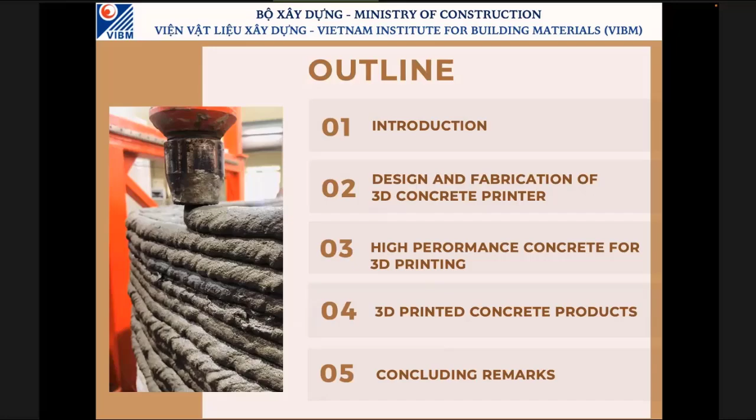VIBM, Vietnam Institute for Building Material, was founded in 1969, and we are a National Science and Technology Research Institute in the field of building material, construction environment and infrastructure. We assist the state management and nationwide development of the building material industry, construction environment and infrastructure for the Vietnam government, and directly for the Ministry of Construction.

So concrete research is one of our key research areas.

Basically, 3D printing is an additive layer-based manufacturing technique, and you might already know some very basic steps for 3D printing. The first is 3D modeling: objects are designed using 3D modeling software, which is very popular now. Then it needs to be formatted as STL, giving information on coordinates and boundaries. Then it should be sliced into layers of the same height, converted to G-code, and transferred to the printer for printing the material.

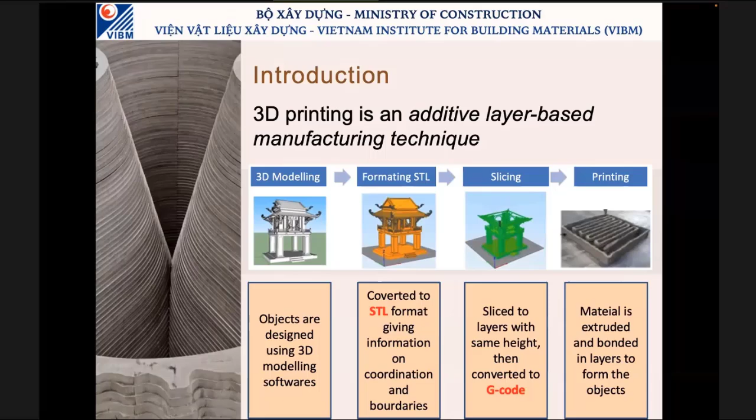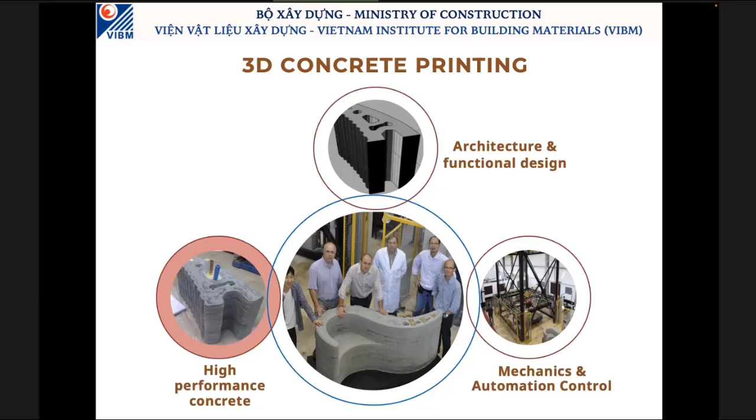So 3D concrete printing, in our view, should be the combination of architectural functional design with high performance concrete, using mechanics and automation to control a 3D printer. I joined Loughborough University over 10 years ago, and we printed the first bench in the world—you can see it on screen with our research team.

In the early stage of research, I joined Loughborough University and we did a lot of tests with the 3D printer—that's the 3D GANTry printer, also the very first printer in the world. We published some key papers, journal papers, like developments in construction scale additive manufacturing process, mix design and fresh properties for high performance printing concrete, and also hardened properties for high performance printing concrete.

I'll show you the graph here of the citations of our journal papers. Over 10 years, the first paper now has nearly 1,000 citations, the mix design and fresh properties paper now has nearly 800 citations, and the hardened properties paper has also been cited over 600 times.

We found that about 5 years after publication—around 2012 up to about 2016, 2017—there weren't many citations for the papers. But in very recent years, about the last 5 years, the citation numbers increased very significantly. You can see in the graph the number of research projects in the world, coming from many countries, also increased suddenly in the recent 5 or 6 years.

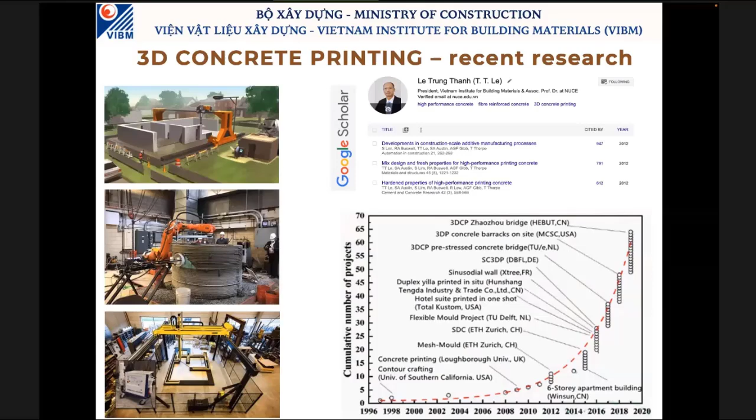With us in Vietnam, Vietnam Institute for Building Materials, we also work with some universities like Hanoi University of Civil Engineering, and also another university, the Technology University in Hanoi called Phenikaa. And we try to design and fabricate a 3D concrete printer, the very first in Vietnam.

We agreed with each other that some key points for designing a concrete 3D printer: it should be a large 3D printing system using a drive system to control the position of the nozzle according to the X, Y, and Z coordinates, using the concrete 3D printing technique by extruding cement concrete material through a nozzle to print concrete layer by layer. This type of design is simpler, more powerful than other options, easy to manufacture, and uses locally available components, which can reduce the cost when building at a larger scale compared to a robotic arm.

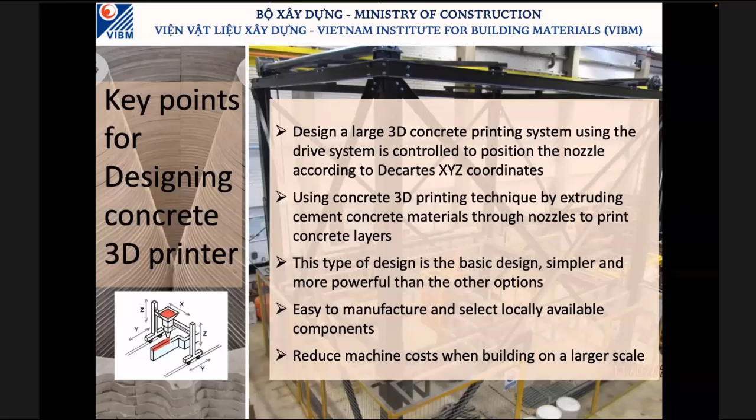We understand that the robotic arm, which some research centers use, is very precise, but we worry about the scale. With the robotic arm, it's hard and inconvenient to print larger scale construction structures. So we went with the 3D gantry printer.

This is what we built, fabricated as our printer in Vietnam. We use a printer with X, Y, and Z Cartesian coordinates. The X-axis assembly has a stroke length of 1.8 meters, the Y-axis is 3 meters, and the Z-axis is 1.8 meters.

The printer is driven by a servo motor with rotational speed control. We designed ourselves a nozzle component, including several parts assembled together, and we use an auger system in this nozzle, with the auger also driven by a servo motor.

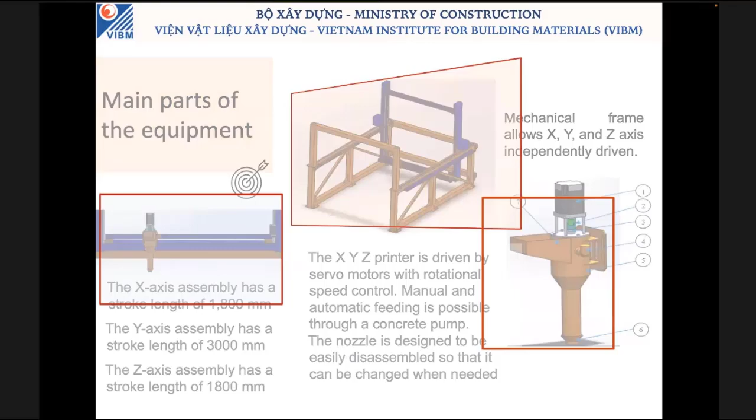With that sort of system, we did the assembly and we have the 3D printer. You can see this is the real one we completed last year.

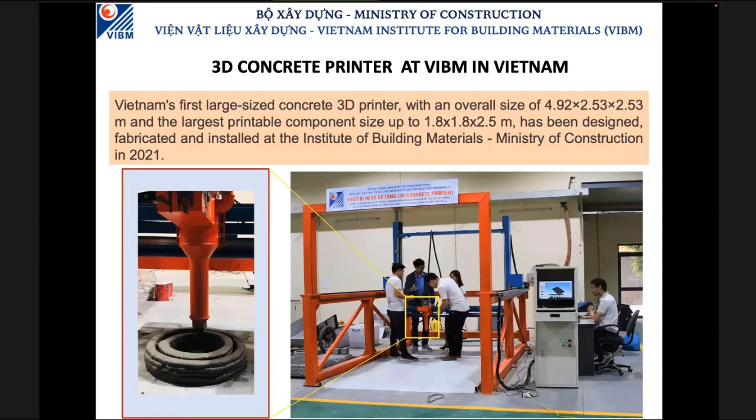The printer's nozzle connects with a concrete pump through a soft pipe, and we can also control the concrete pump to pump fresh concrete to the nozzle directly. We also have a control box with our own developed software, though there is some available software in the world. We started to design components and print some components.

Now we move to the second part, to introduce the high performance concrete for 3D printing.

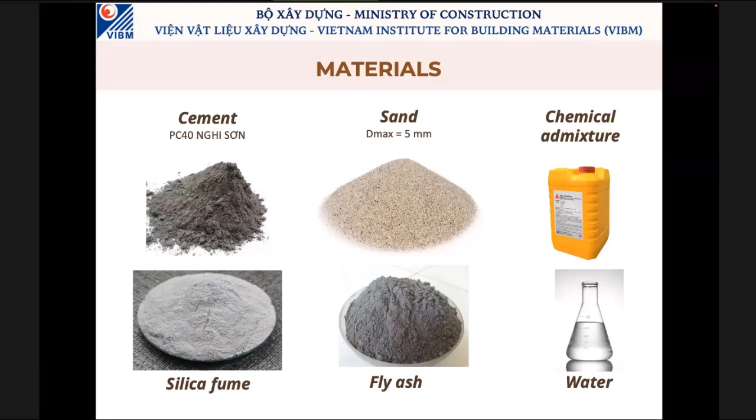We use readily available normal raw materials, including cement PC40 and also PC50. Different from other countries like Europe, which use 52.5, in Vietnam we use 50 and 40. We use sand with a maximum size of 5 millimeters, and we also tried a maximum size of 2.5 millimeters. We also use silica fume, fly ash, which has a very large volume in the Vietnam market now, and for chemicals, we tried different admixtures but came up with one of the Sika admixtures.

The mix proportion was optimized based on some very basic criteria: workability, open time, strength, extrusion, and durability. If you have read the paper we published 10 years ago, we define what buildability, extrudability, and open time are.

We all know that 3D concrete is really challenging because it should have very good fresh properties for extrusion, but it also needs to have good buildability, which we define as the ability to build as many layers as possible. In open time, we need to keep the fresh concrete as fresh as possible.

The very basic measurement is testing workability, and we need to test it after time intervals to know how many minutes or hours it can keep its fresh properties. In this series of tests, we tried to optimize with different silica fume content, fly ash content, water ratio, and aggregate ratio.

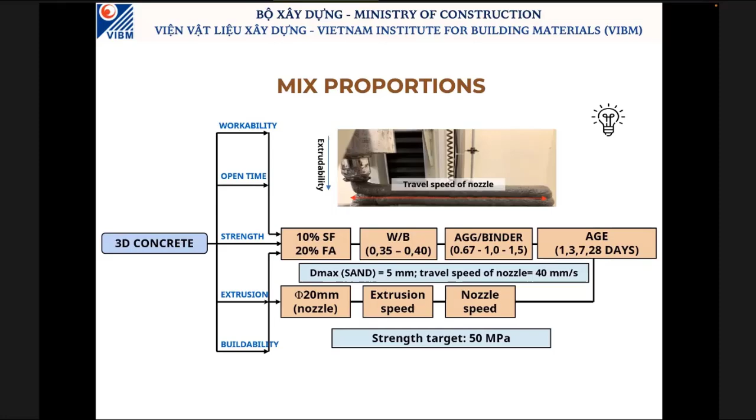The strength target was 50 megapascal.

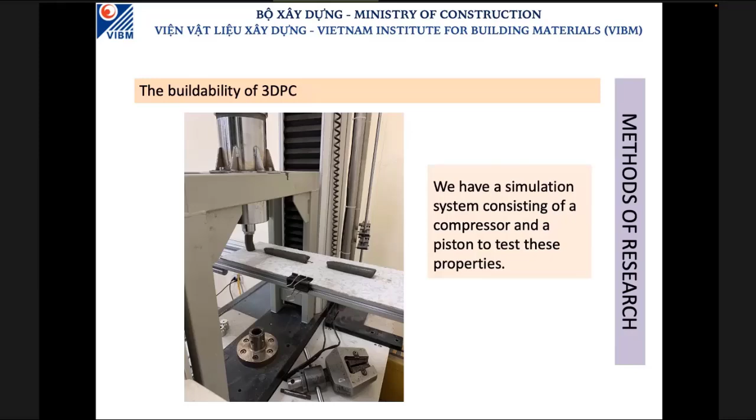So the method of research here, we do a lot of buildability tests. First of all, we use a motor with the compression machine. We use this equipment we developed ourselves, designed and fabricated in VIBM with the piston system. That's a simulation system consisting of a compressor and a piston to test the buildability.

We did a lot of different mix proportions for optimization. We mix this, measure workability, then put it in our measurement system for buildability. This is a piston system, a small piston.

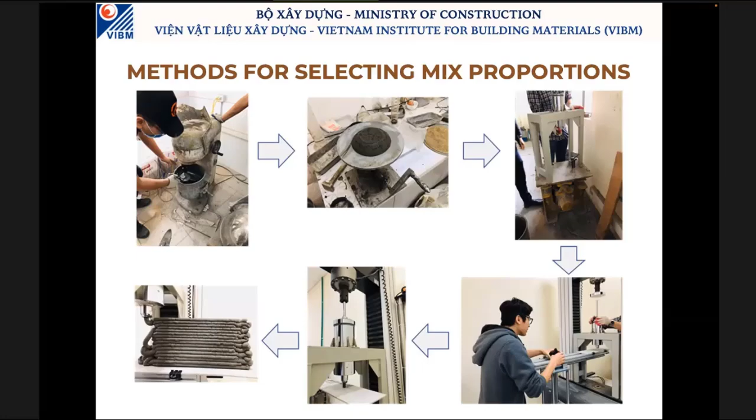The workability, we test with different water binder ratios: 0.35 and 0.40. Sand binder ratio vary at 0.67, 1, and 1.5. We test the workability and measure after 60 minutes.

And we found that a number of different mixes decrease the workability after time.

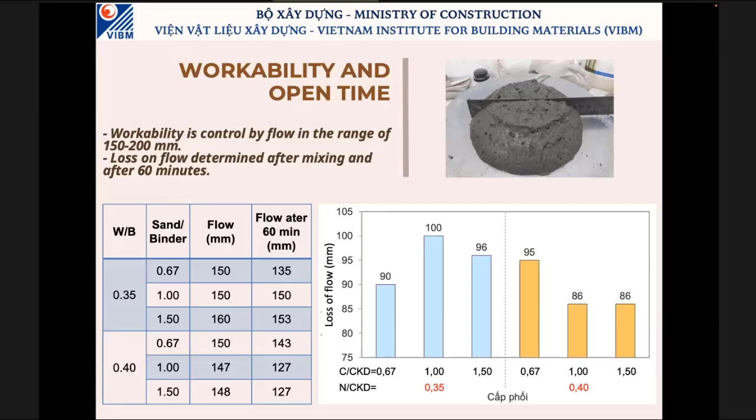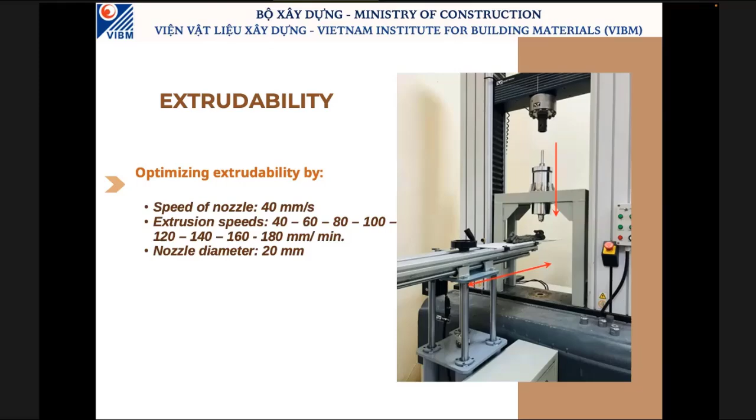For extrudability, we try to optimize by variation of speed of the nozzle, 40 millimeters per second, with extrusion speed 40, 60, 80, 100, 120, 140, 160, 180 millimeters per minute, with 20 millimeter per minute interval. The nozzle diameter we test using 20 millimeter diameter, and you can see here the extrudability.

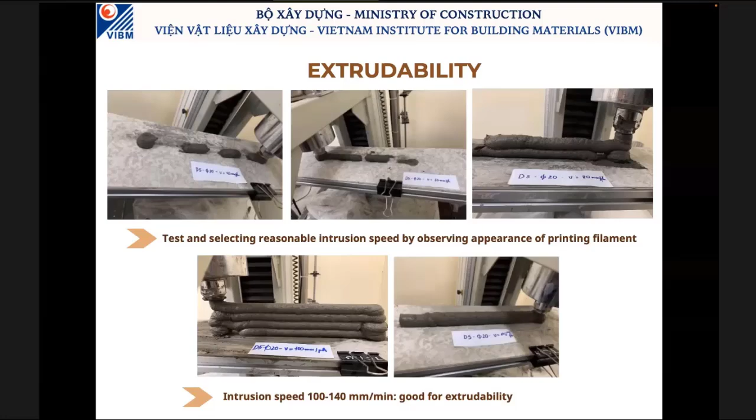Some mixes were not really good, and finally we found some mixes had good extrudability. The extrusion speed should be 100 to 140 millimeters per minute.

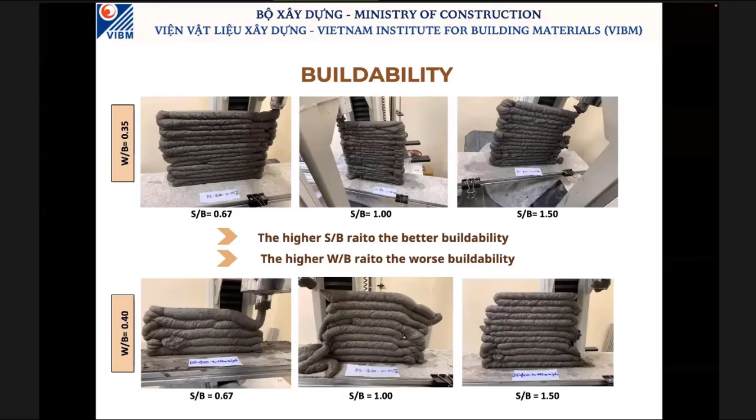So the higher sand binder ratio, the better buildability. The higher water binder ratio, the worse buildability. Just in general.

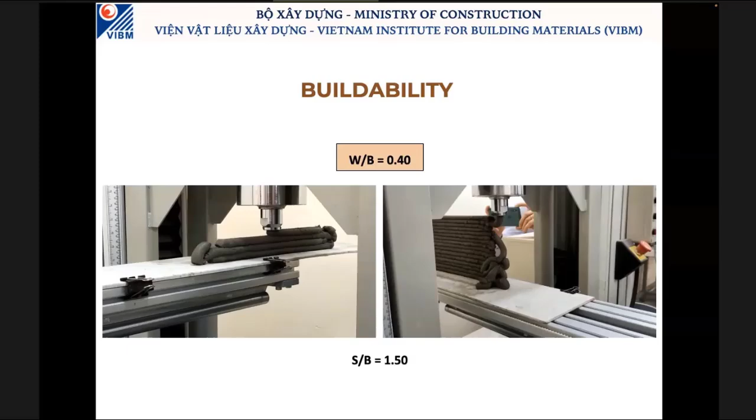You can see a very short clip showing we test buildability with only one single layer, one single bead, and it can build with different layers using different mixes.

So the buildability with water binder ratio 0.35 mix also has good buildability, but not really smooth surface of filament. With 0.40, quite good buildability and smooth surface of filament.

So we selected water binder ratio 0.4 for tests in the real printers.

As I mentioned, we varied the ratio of sand and binder, and found that they also have quite good buildability, but lower sand binder ratio gives good binding between filament and smooth surface of filament.

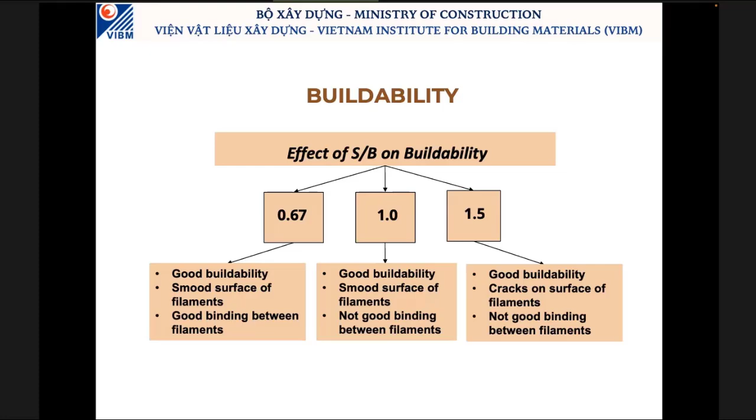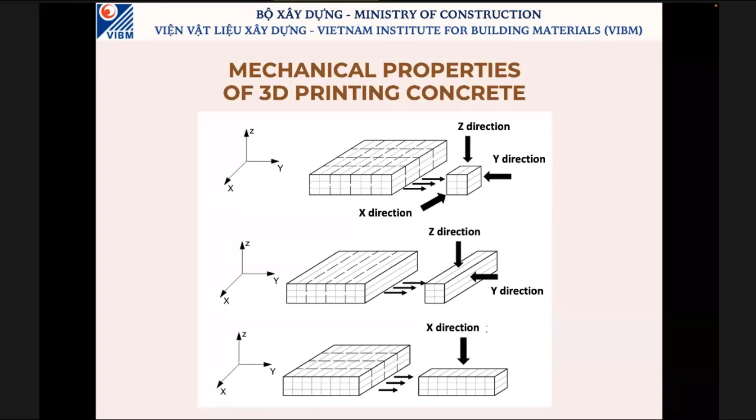So we used the big printer for printing a number of blocks like that to test different directions of concrete printing. Here is one of the blocks we printed using our printer.

After being printed, the block was cut to make a number of cubes and beams for compressive strength test and flexural strength test.

We also printed a number of blocks and cut them to make samples for bond test. So we tried to apply the tensile load to determine the bond strength between layers.

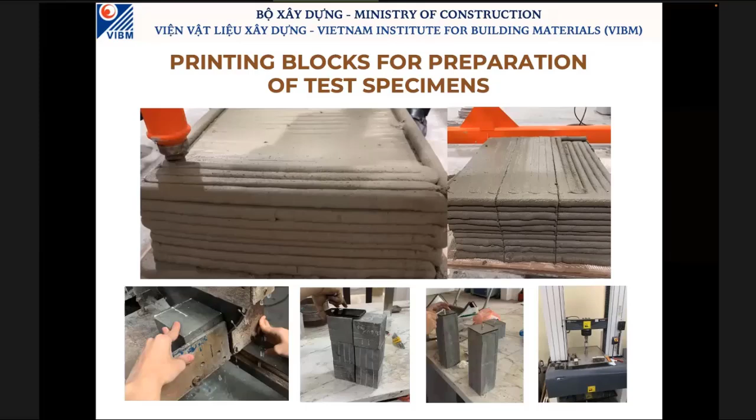We also print and measure a number of specimens for drying shrinkage. So we can see on the screen the cube, the beam, and also the tensile bond strength test with the specimens shown in the lower right corner pictures.

The printing direction really influences the compressive strength. We found that the compressive strength in x-axis specimen is the lowest, and the y-axis has better compressive strength, and the z-axis is also quite higher than the x-axis specimen, but at 28 days finally it's lower than the y-axis.

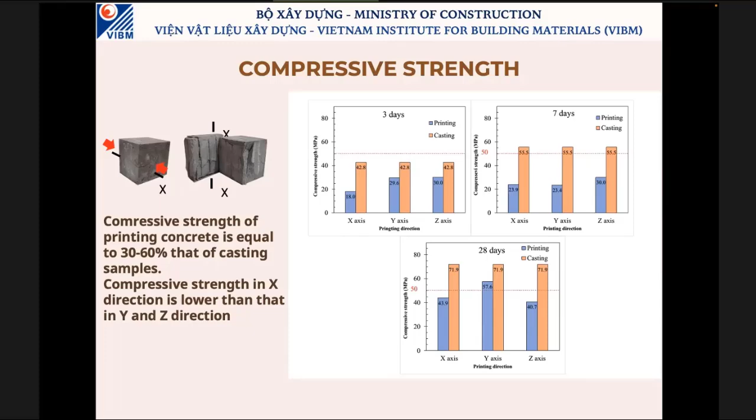So the comment here is the compressive strength of printed concrete: we found it varies from about 30 to 60% that of casting specimen, and the compressive strength in X direction is lower than that in Y and Z direction. Quite similar.

Quite similar ratio of test results with flexural strength. This is without fiber, and we also measured the flexural strength at 3 days, 7 days, 28 days, and compared the printed specimen and the cast specimen. We found that flexural strength of 3D printing concrete without fiber is equal to 30 to 40% that of cast specimen, and also the flexural strength in the X direction is the lowest result.

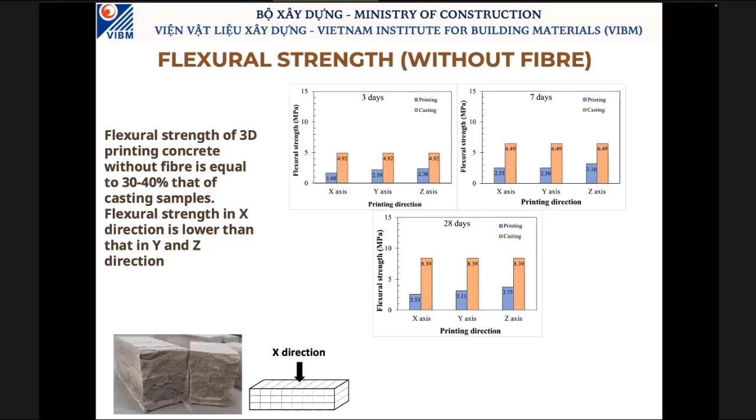With the fiber, we add polypropylene, micro polypropylene fiber, and found that it improved the flexural strength at 3 days, 7 days, and also 28 days. The flexural strength of the fiber printed specimen improved to about 50 to 70% that of cast specimen.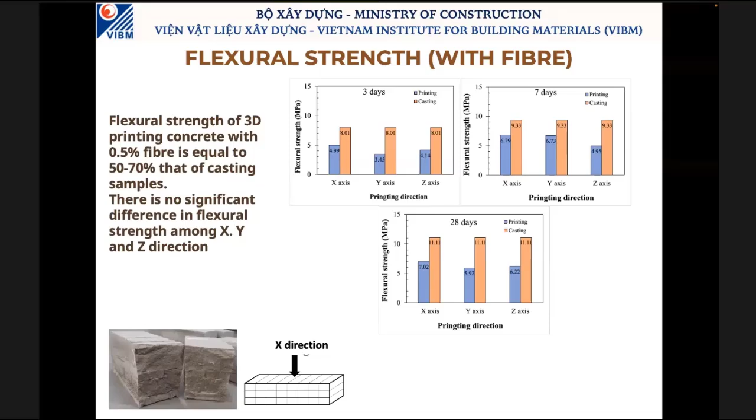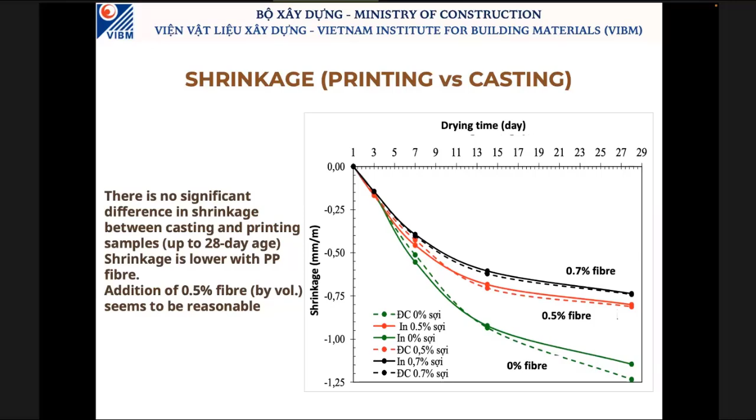So we have a printer. We also have the high-performance concrete. Then we did a number of printing with different products.

The first one, we tried with the curvy chair, and we were successful printing this curvy chair. It's just one single bit, so actually it's not really strong. That's just a model to show how our printer can work for curvy objects like a curvy chair.

The size, the height is 1 meter, and the width of the chair is 0.65 meter.

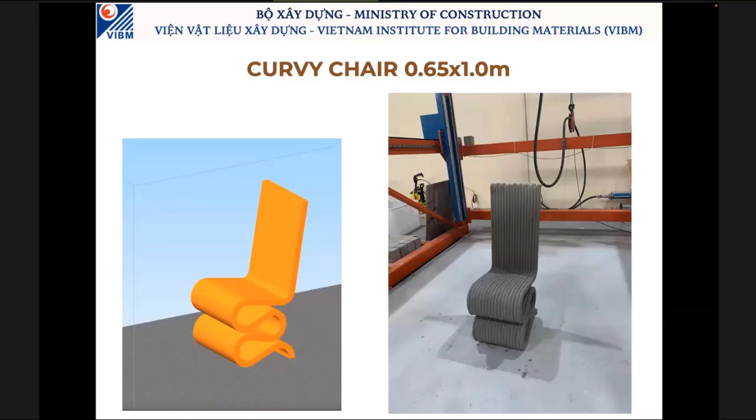We moved to another more complicated shape objects that we print. We tried to print curvy chairs and a table with a size of 1.9 by 0.7 by 1 meter. You can see here we do this 3D modeling.

Then we slice the object in our software, and export it as a G-code file for the printer. And so we completed the printing of this curvy chairs and table, and it's strong enough to carry two persons at the same time, and now it's in VIBM.

Hopefully one day some of you will visit us, and you can visit on site in our institute. Okay.

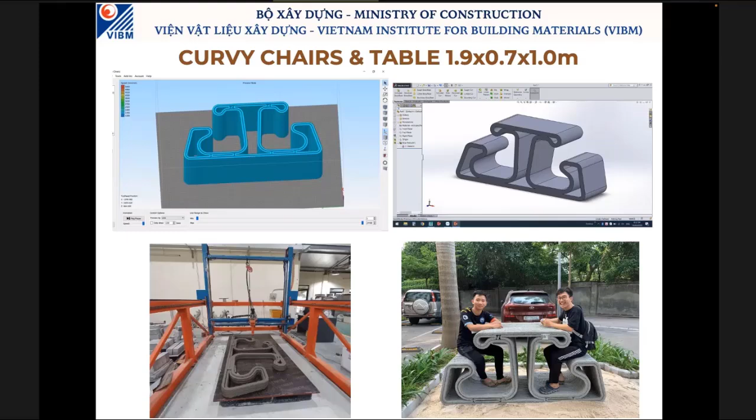After that, we tried to build a bigger one. This is a sentry box, 2.6 meter high, and 1.8 by 1.8 the plan.

We had a lot of discussion about how to print that with our printer. Actually, we can print one shot for the whole sentry box, but it's really hard to move it out of the printer. So finally, we made the decision that we would print 3 different components, and we would assemble them with each other.

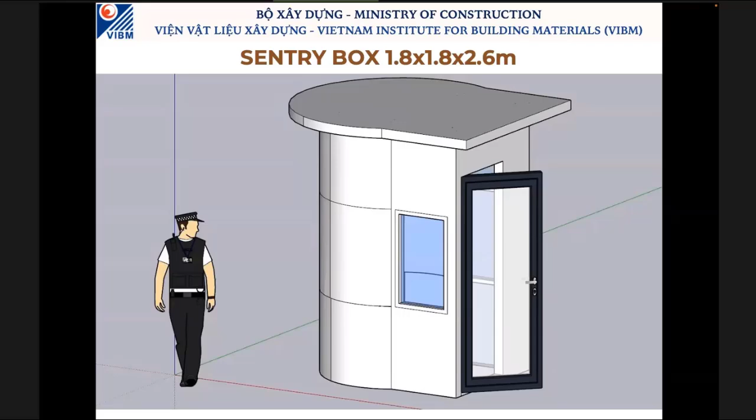So this is the first component we print, shown on the screen. It's actually quite curvy, being half of the sentry box cross section, and in the wall you can see here a lot of voids.

And we print the 2 sides of the wall, and we print the zigzag filament inside of the wall.

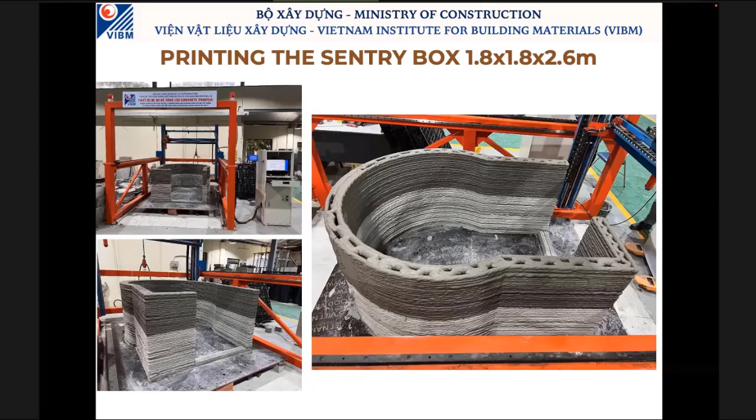Anyway, I will show you later a short movie about how to design and fabricate a printer, and also how to print some components, so you have more understanding about what we have done.

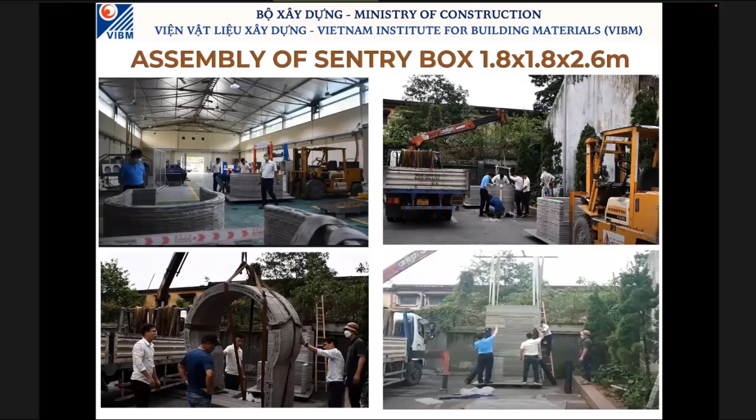Okay, so this is some pictures of the components we printed. This picture shows you how we moved the 3 different components outside of the laboratory, and we did assemble them.

We assembled 3 components, and with the high performance concrete, it's strong enough that even the component you can see here could be moved and rotated outside of the lab, with a very simple cable and crane motor, and we were successful in assembling the 3 components with each other.

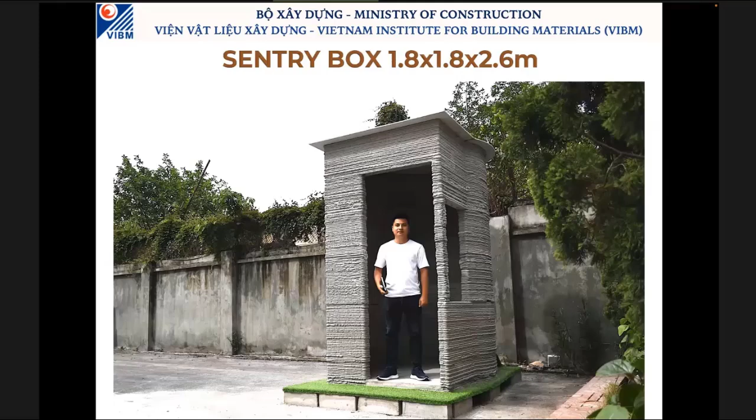Here you can see the complete sentry box. That's what we did in VIBM.

Anyway, okay, I will show you a short movie about what we have done, and maybe you will have more understanding from this short movie.

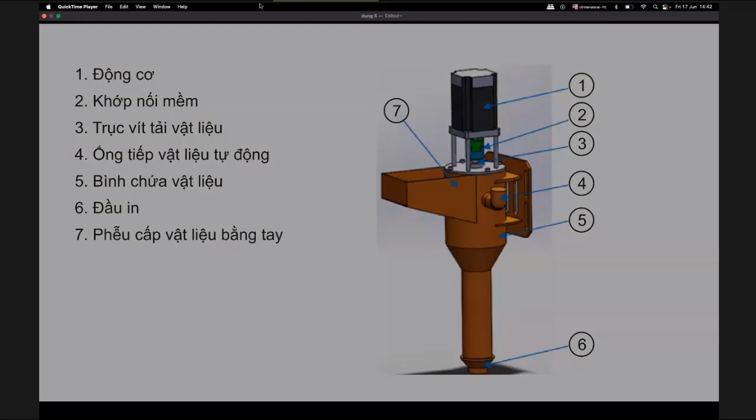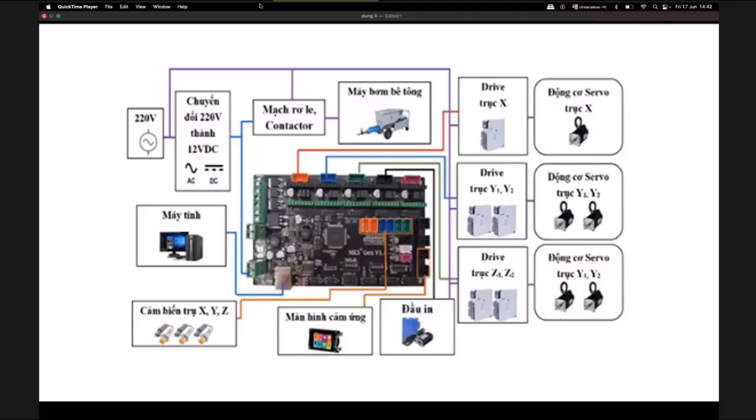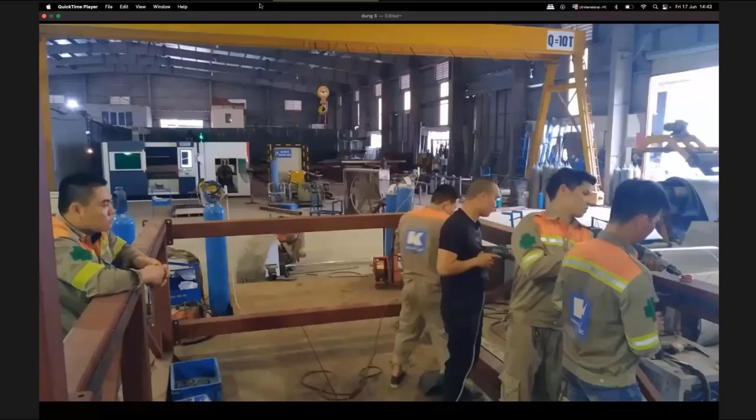It's a Z-axis design. It's an X-axis with the nozzle mounted on the X-axis. It's a nozzle design, a nozzle mounted on the X-axis. This is a control board design. Frame fabricated in workshop. It's a test for durability, system testing. Assembly.

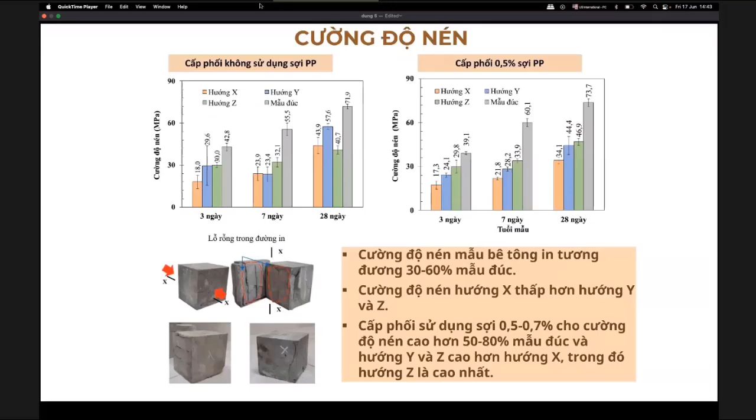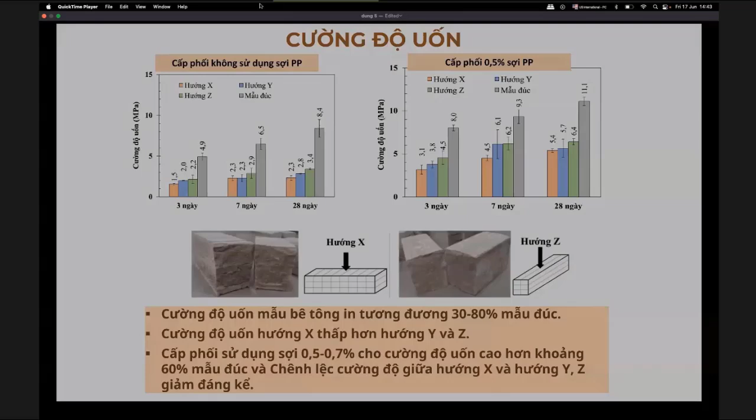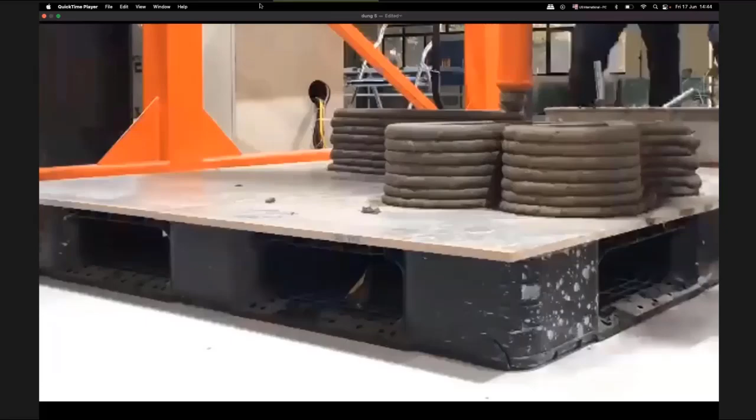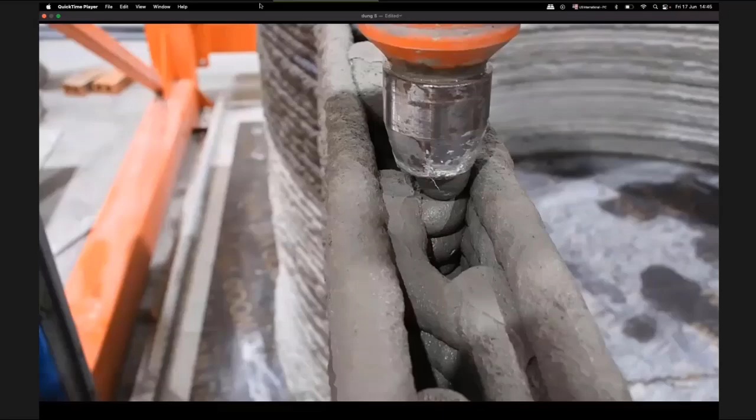See the concrete print smoothly. It's a fiber concrete mix.

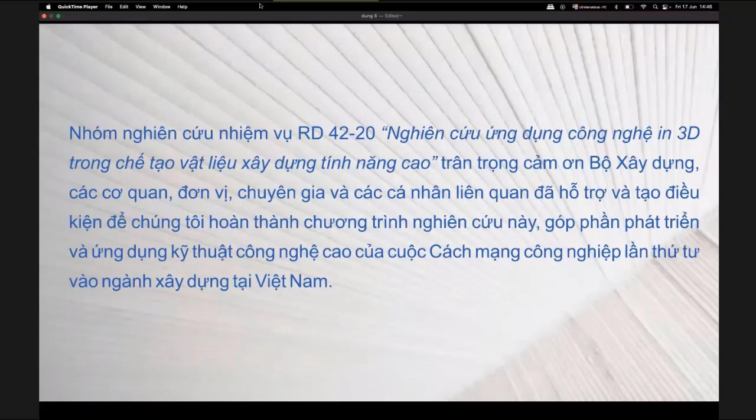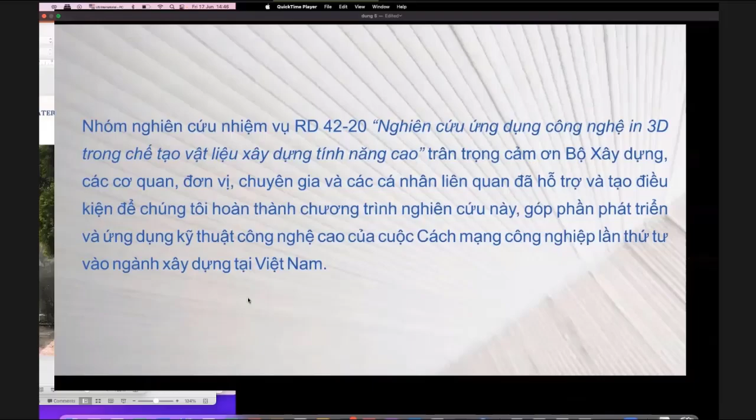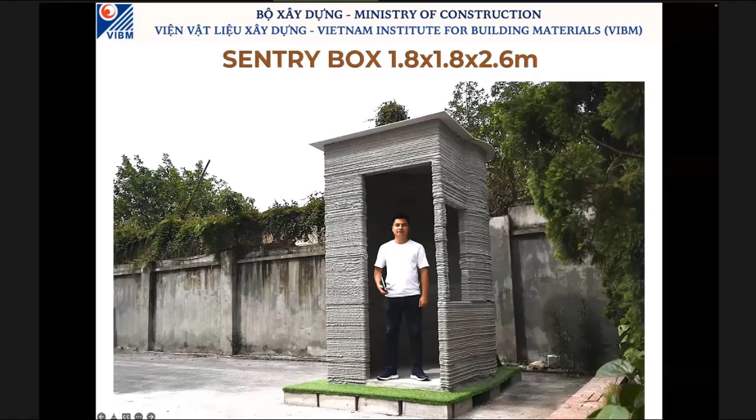High performance concrete having good extrudability, durability, open time, and over 50 megapascal compressive strength, and also over 8 megapascal flexural strength, less than 0.2% drying shrinkage, has been developed and can be used effectively for 3D printing.

The material and the printer has been deployed to print successfully some architectural objects, a set of curvy table and chair, and a sentry box.